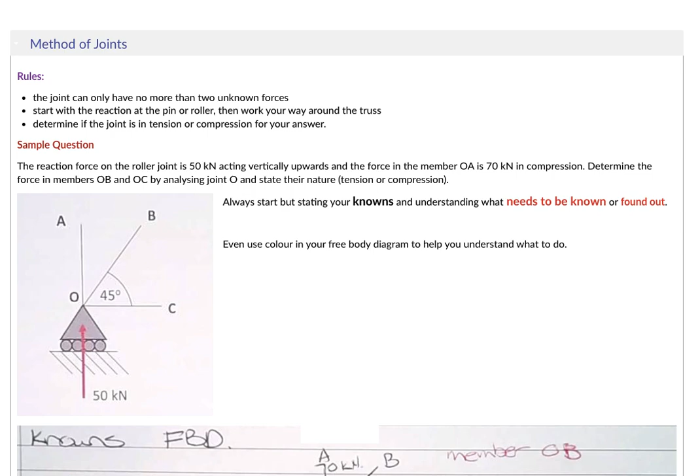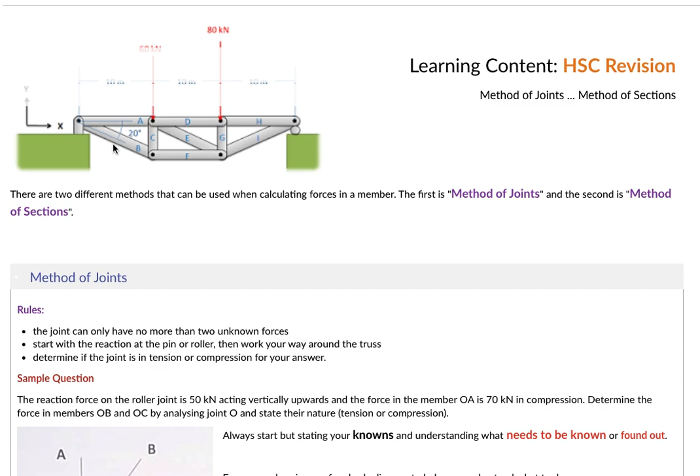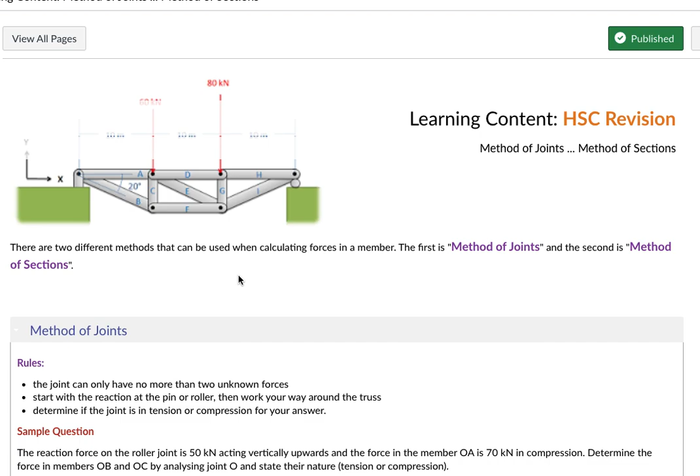Okay, so the next part of calculations that we're looking at is the method of joints and method of sections. So what these are used for is to be able to analyse the different joints or the members to discover whether they're in tension or compression. Okay? So the whole idea here is we can actually work our way around this drawing, but if you wanted to go a little bit quicker, the method of sections can actually speed up the process.

So firstly, with the method of joints, and that's what this video is going to focus on, there are some rules. Right? The joint can have no more than two unknown forces. Okay, in this diagram here, I can see there's one force going up, but when you actually come to the question, it actually gives us a second force there as well. So we've got force AO, and we have the upward force on the roller joint that hasn't been labelled.

So looking at this force now, basically to work this out, we need to actually sum our forces. We have this force coming down, which is 70 kilonewtons. We have this one going up, which is 50. Okay, so that allows us for pretty much 20 kilonewtons here in this member. Now, as you can see here, we have a nice little triangle that's happening. So we have a 45-degree angle and we have this one here.

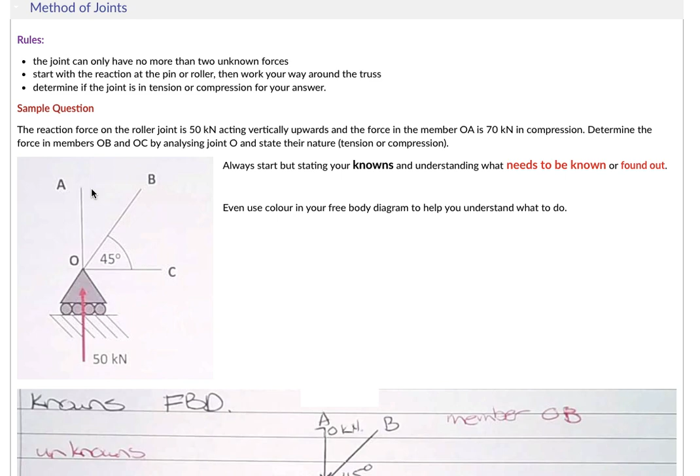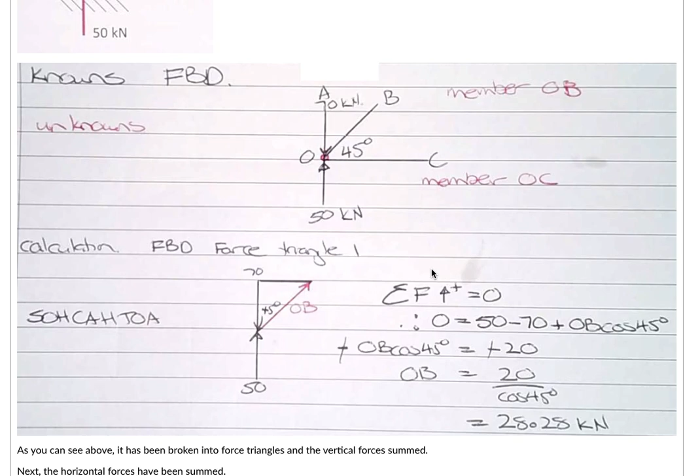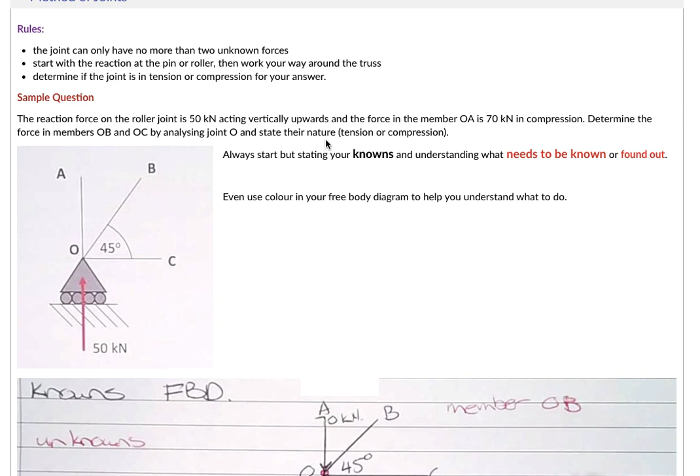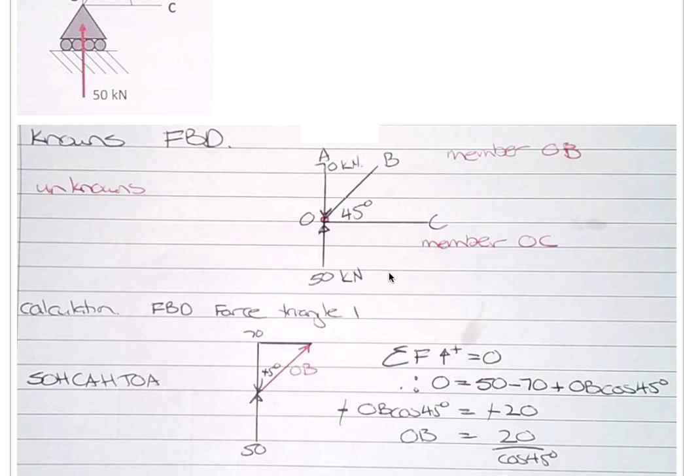We need to, firstly, work out our FBD and what we need to actually find from the questions. And, trust me, I'm doing this in red so I know what needs to be found out. They are my unknowns. Coming back to the question here. Determine the members OB and OC and state what their nature is, whether it's in tension or compression. So by writing this here, I'm going to remember. Okay, so now I've got this all broken down and I can start to see what I need to do. You can see I've drawn my first force triangle here.

Now, all I need to do is sum the forces. So in this case here, the sum of all forces going up, I'm saying, is going to equal 0. Now I've made an assumption that this force is actually going to go up, which means it's pulling away from that joint, so this is going to be in tension. Okay, now I've made the assumption. I may get it right, I may get it wrong, but we'll work through to see whether or not I do.

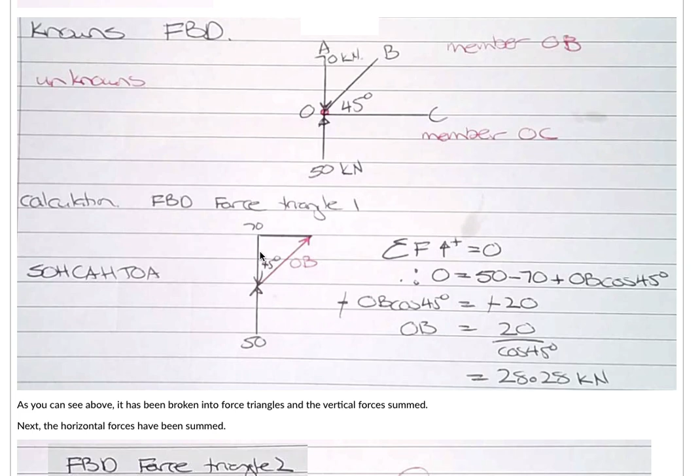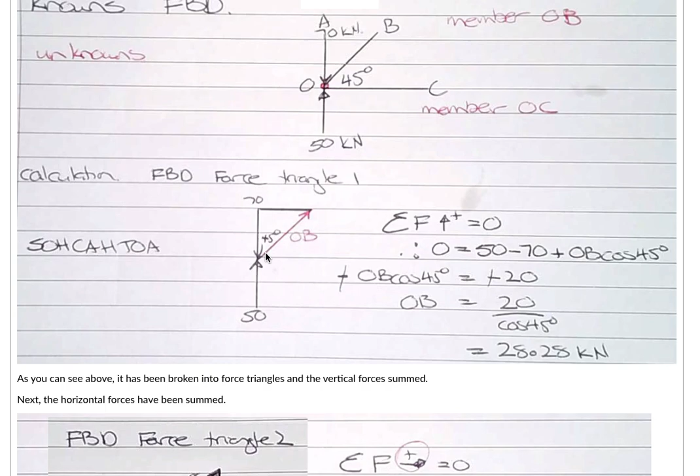Okay, so like we've actually done here, force going up is 50, force coming down, which is the opposite, is minus 70, plus OB cos 45, okay? So I've got adjacent over, okay? So I'm just working it through that way. As you can see the math there, throwing that over the other side, negatives cancel out, and then I divide to get my answer there. Now, because this is a positive number, it means I've got my sense right. So this red line is correct, and that is the direction that the force is actually pulling on that joint.

Now, I can do my second force triangle here, and again, I am summing the forces, right? So this actual triangle has both horizontal and vertical forces. I've skipped a step and didn't break it down, but that's what we're actually looking at, the horizontal and vertical components of this. So again, I'm assuming that the force is going this way, and I've stated that. And now I can start to do my calculations. 0 equals positive OC plus, because I've got the force going this way as well, which means it's pulling this way, OB cos 45. Okay, because I need to actually find this one here, and that's my OB.

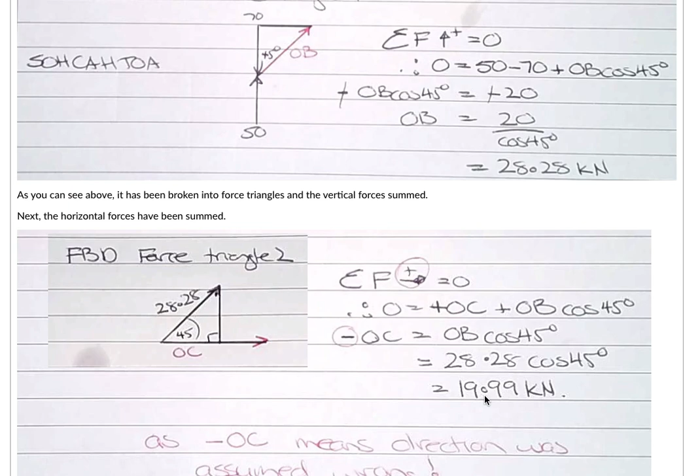Now, as you come down, I've got a minus OC, which means that this is minus 19.99. What that actually means is that I've assumed this as being the wrong direction. Okay, it's the wrong direction. No harm, no foul. All I need to do is, in my answer, actually just turn that arrow around and state it as such. And because it's actually pushing onto the joint, the nature of that joint there is in compression.

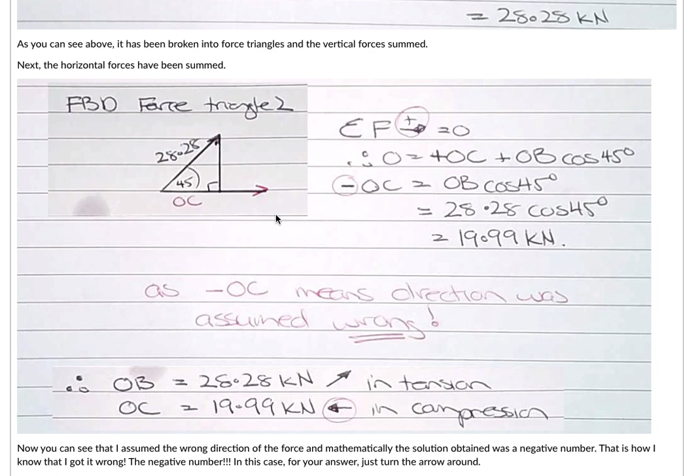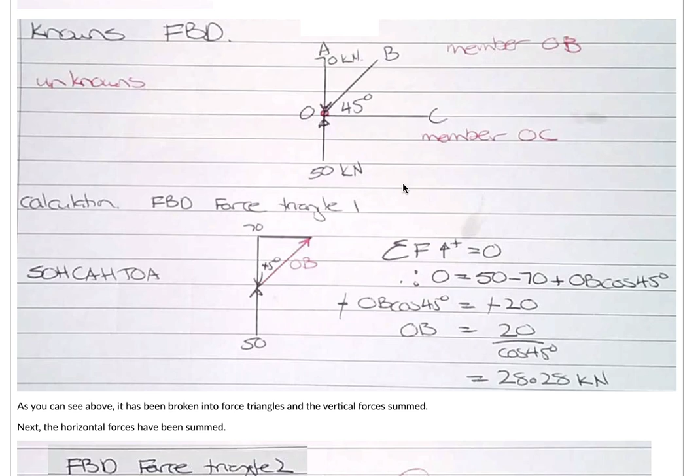Okay, so like I said, the whole idea of this is slowing down and breaking it down so we can see what we need to do. You can see that even in this free body diagram, it's starting to form triangles, and that's what we're trying to work out. Each of the members of the triangles, and that tells us the force that's actually acting on that joint. Okay. The sense is quite important, especially when we go further than this, to make sure that we get that right. But you just work it through until we get down to this.